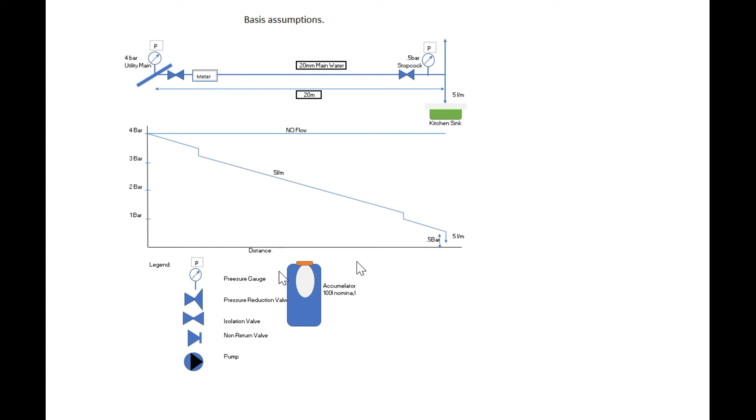Now, an accumulator is basically a steel tank with a membrane that is compressed with some air, and under normal conditions when the vessel is empty, the membrane may follow the profile of the accumulator. Not always. It can take up some of the space. Okay,

so what we want to do is we want to boost the mains. We need 8 litres per minute in the house, and we need it at 1.5 bar. So at 1.5 bar, what can the mains give us? So we throttle back here or at the tap until we get the pressure here up to 1.5 bar. That's actually shown better on the next one. So we get that pressure up to 1.5 bar.

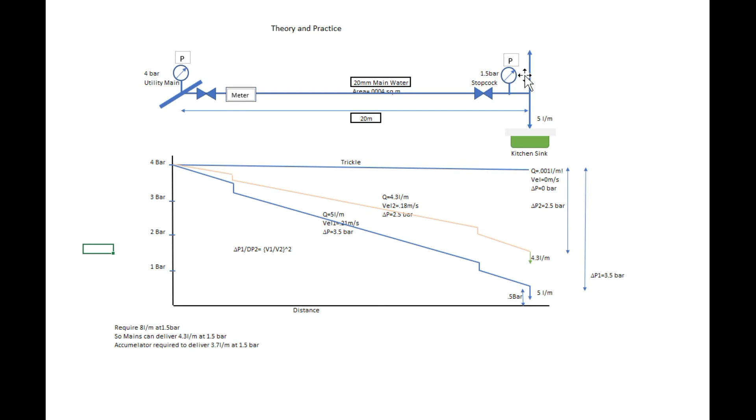We now know the pressure that we want. We have the flow rate and the pressure of the system from the first test. So substituting those figures, and the delta P, into this formula here, we can get the velocity to give us 4 litres at the outlet here. I'll go through that again.

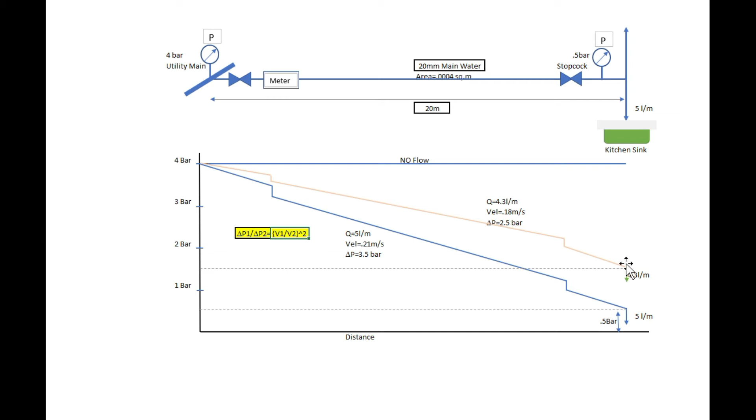We have 3.5 bar under the normal condition when the tap is open. We throttle back in order to get 1.5 bar at the tap. But that gives us 2.5 bar of a drop. Using that formula then, we can calculate that this is roughly the profile that we're going to get.

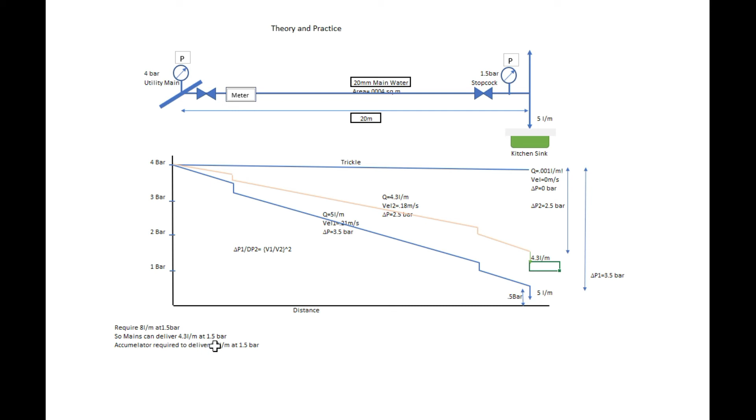Now, we require 8 litres per minute at 1.5 bar. So we know that the mains can now deliver 4.3 litres per minute at the 1.5 bar. So the accumulator that we're looking for has to do 3.7 litres per minute at 1.5 bar.

So we fit the accumulator. We put a non-return valve here. If there isn't one in the meter, you're better off putting one there. Forget about the pump for a minute. We'll go into the accumulator, back out through a pressure reduction valve, and into the system.

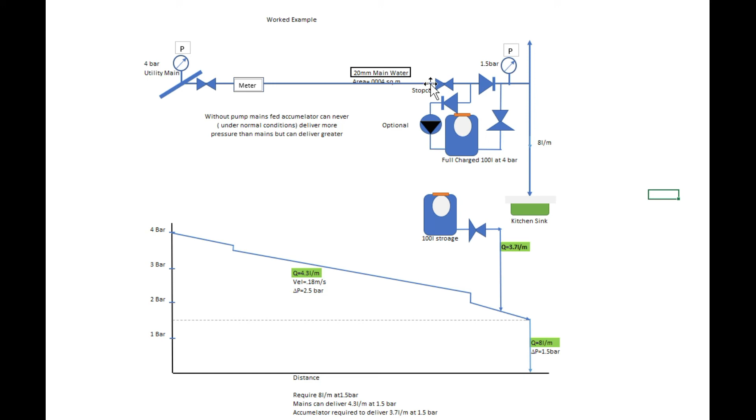And we have a non-return valve here, just in case the mains pressure during the daytime drops below the charge pressure that we have from the night, which is 4 bar. So we're after charging this during the night time up to 4 bar, and we have 100 litres of water in it.

So we now have this profile that we know the main is going to give us 4.3 litres a minute at 1.5 bar, and the accumulator will give us 3.7 litres per minute at 1.5 bar.

So if we set this pressure reduction valve here at 1.5 bar, we're going to maintain the pressure at 1.5 bar, which is going to equal the mains pressure coming in. So now we've got our 3.7 litres per minute and our 4.3, which gives us 8 litres per minute at 1.5 bar.

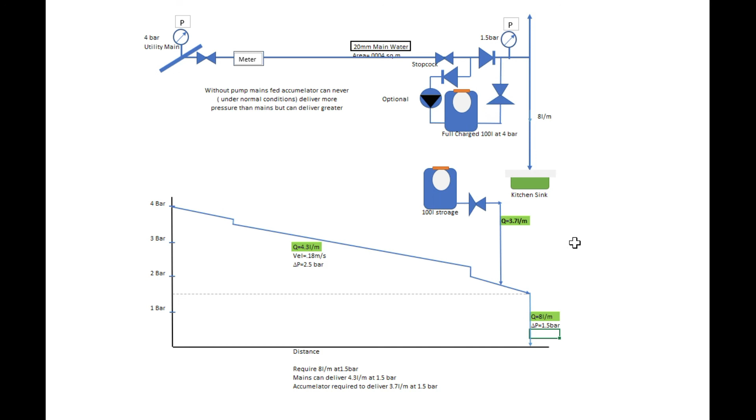Now you can also boost it higher than that if you put a pump in and charge the accumulator above the mains pressure, but then you won't get any assistance from the mains, so you're relying completely on the accumulator and what's available from it to discharge. Right, that's it.